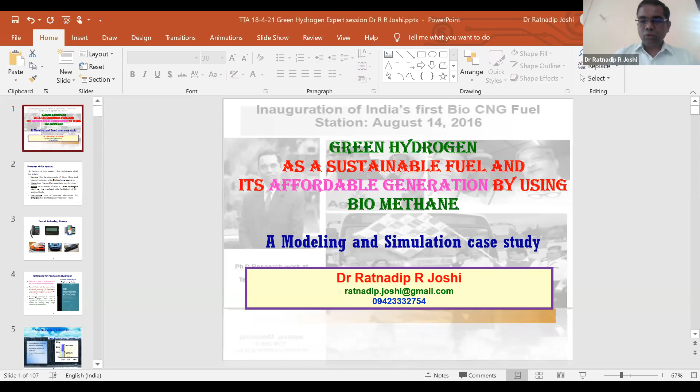Today's topic that has been allotted is something which reflects the newer changes in technologies. With a group of people where sometimes there are keen academic understandings of principles, or it goes on for applications and technologies, to present to such a group is really a difficult task for me.

However, I'm trying to give some good input to each category of people who are interested. Some might be into academic research, some might be into developing technologies, some might be installing plants, or it could be venture capitalists who would like to set up and support similar future technologies. So at the outset, I thank the TTA for the opportunity to discuss and share.

Today, we will be discussing green hydrogen as a sustainable fuel and affordable generation by using biomethane. The case study presented here would be more on green hydrogen. However, we still need to look into what are the other types of hydrogen, and what we really call green hydrogen.

So though the title itself, we generally say hydrogen is a fuel, but in reality, hydrogen is not a fuel. It is a carrier gas which can carry heat value and deliver it, and that's a great advantage. It is like a media, for example recuperative heat exchangers, where we are heating the surfaces alternatively, and the surface remains the same, so we can use it multiple times. Same thing happens with a carrier gas, because the same hydrogen could be used and leveraged for heating purposes many times. Let's now move into one.

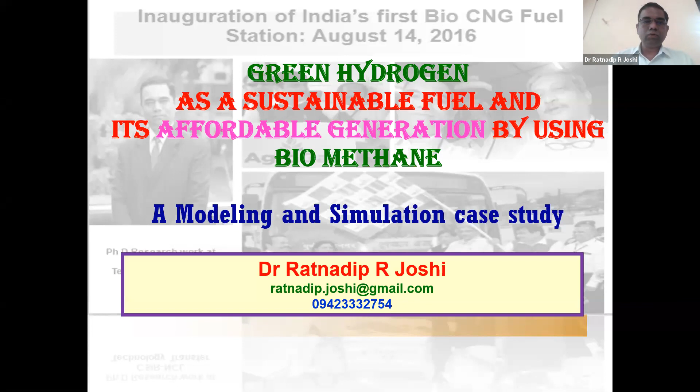Today, after the session, as a practitioner of outcome-based systems, I would always like to see what the learners or participants in the session would be able to achieve.

So we'll have a review of developments of gray, blue, and green hydrogen, what they really mean, and we'll come to understand the biomethane economy coming. Now when we say biomethane economy, I would like to make it clear it encompasses everything. It encompasses second generation bioethane, second generation ethanol or methanol, and dimethyl ether replacing diesel oil. All these economical aspects come when we talk on biomethane economy.

Let's understand how SMR and other forms like autothermal reactors and pyrolysis systems work for development of methane. Then we'll go for understanding green hydrogen plants, which I would show with the information and communication tools that have been enabled. Let's encourage the use of process simulators for simulation of such plants, which has an ideal case developed here that could be replicated as per requirement. Some of you who are interested, we can develop according to the size and system we could be providing.

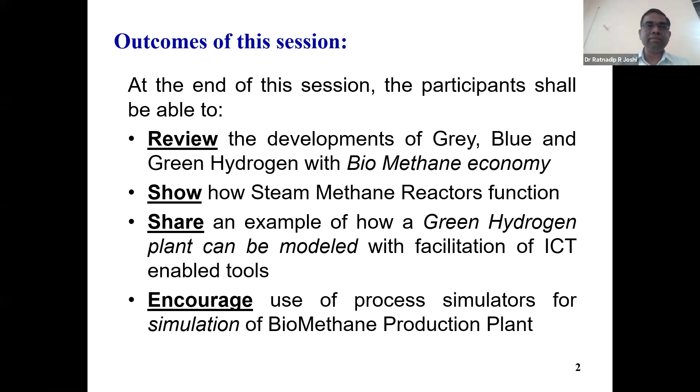Now why really do we want to do this? What is the piece? Let's see: we had been conveniently using landline phones, which were wired telephones. Suddenly, in between, there was a disruption that came as a pager, and before it even penetrated to 0.3% of the population, we got cell phones, which is now almost close to 68% of the population.

Now, will the same thing happen, that we would have a car running on fossil fuel or maybe natural gas, including oil, gas, coal, and maybe sometimes nuclear power, which are conventional? Then going to the middle one, which is an electric vehicle, battery operated vehicles - a fantastic topic. Lithium ion, sodium ion, lithium polymer, so many things we are discussing, empowered by solar thermal, solar electric, sort of photovoltaic - so many compositions we are looking into.

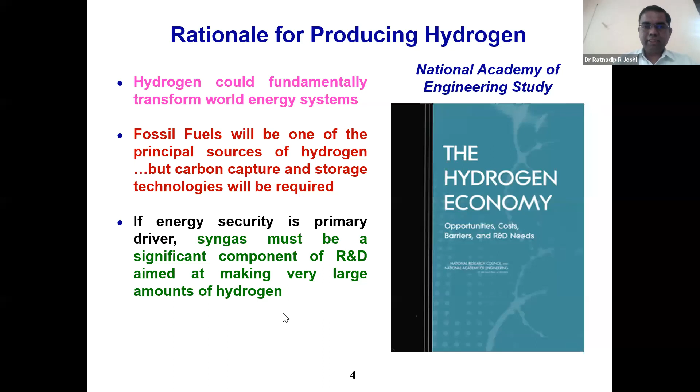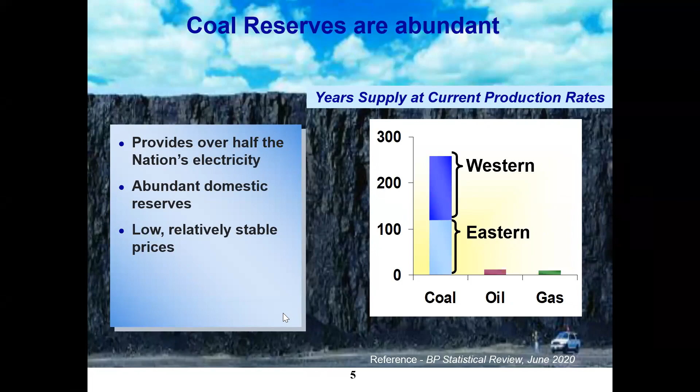Let's look at the Energy Outlook, recently published in September 2020. We can see the CO2 emissions coming with the help of usage. The green line here represents the current scenario - the way we are functioning right now, the way CO2 will come out.

With newer technologies, we are reducing the carbon tonnage per usage of application. Suppose we go for a reduction into the process, we will go for net zero. Firstly, we will go for a rapid reduction when we set the targets - what are the targets, we'll come to understand. Then with net zero, we will be able to cool down the temperature of the whole earth by 1.5 degrees centigrade, and the present target is around 2 degrees centigrade.

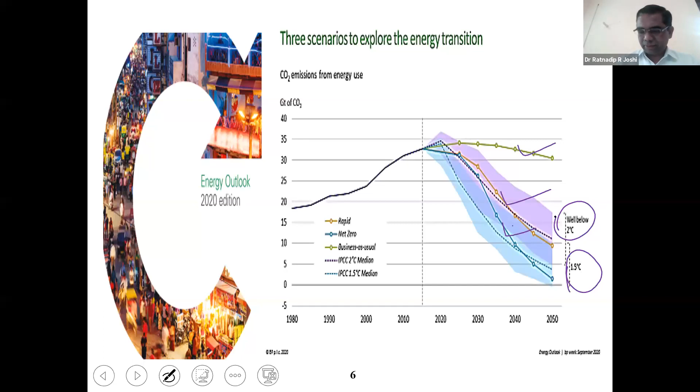So the melting of glaciers - we have recently witnessed such mishaps with increasing levels of sea waters and drowning of cities - that could all be avoided. So you can easily see this is the ultimatum we have to work on. This is why we really need to understand it fantastically with the statistics. Some other statistics I am providing to you here, you can see about it.

So the fossil fuels, renewables and electricity and their reduction - you can see the fossil fuel graph first. There is all kinds of reduction happening, and there is a predictive graph, so you can say 2030, 35, 40, and up to 2050.

What about renewables? When it comes to renewables, you can easily see the share at present is drastically increasing and will pick up around 2025 to 2030. And it comes to electricity - obviously with EVs, we are talking with fuel cells coming maybe 10 years away from us right now. So here again, the mobility systems need more electricity.

This is what I'm trying to present in a techno-commercial way, so we understand the commercial aspect, the business acumen associated with these. The changing structure of the global energy system - if we see oil and coal, there is a drastic reduction happening, and the remaining oil had a peak in '75, and now the numbers are coming monotonous parallel to the abscissa, reducing into the systems.

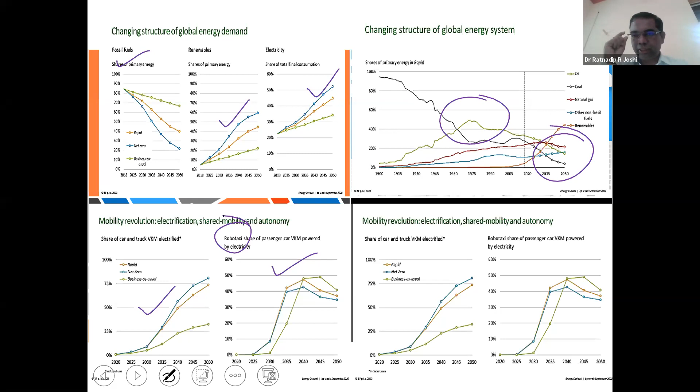With technology change, it is really feasible. A year exactly down the line, if somebody had said so many collaborators would come together with e-services and webinar series, nobody would have believed it. However, a year down, it is completely true. And when we come to the next one, where mobility revolution systems do come with the analysis.

So here I'm presenting more on where natural gas as a source of near zero carbon energy - why are we talking natural gas? Because we want hydrogen basically coming from natural gas. We don't have any other resource, and that's what we have to look into - the source from where hydrogen is coming, where hydrogen becomes a resource. The share of natural gas, abated and unabated both, if we look into with business as usual, what we are doing right now, obviously it would be reduced.

If we go for a rapid scenario, it would be around 40%. And if we go for net zero carbon, I understand that carbon positive, carbon negative, and neutral are all talking about zero emissions. So these concepts are all clear today.

Whatever I'm even speaking right now, I'm contributing to carbon generation. My carbon footprint is positive. Then we go for carbon neutral, where whatever carbon I am generating, I am reducing that, not sequestering, right? I'll come to that point later. And when I am producing less carbon than I am consuming, that's carbon negative. And maybe that is farther away. However, at least net zero or carbon neutral is the aim we're looking into.

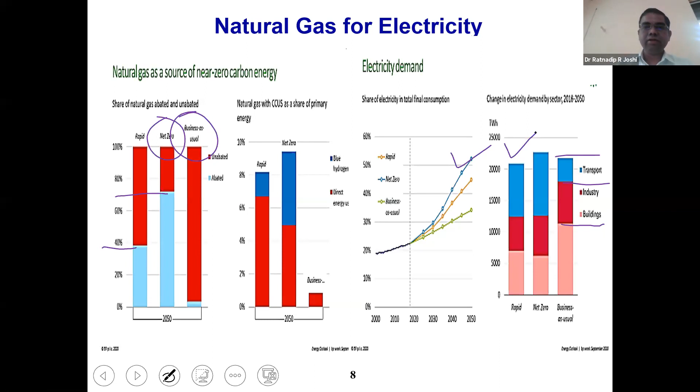Now this is more interesting for us because there are so many other ways of energy storage that we keep talking about. Some people say, let's store in batteries, for example. We will have wind power. Wind power is, again, a source for hydrogen also. So we'll get that, store it in batteries, transport it, then that could be used for converting into methane and hydrogen splitting. However, what are the chances of them becoming more prevalent?

And that's what I was always proposing, that's my thought, whether EVs will be a very intermediate thing for the future, coming in for the next 5, 7, or 10 years maximum.

It could be hydroelectricity, hydel power plants, for minutes and hours. The scheduling for coal thermal power plants, again minutes, hours, and sometimes 2 days. Then hydro with reservoir large capacities like Three Gorges in China, which is really scary and terrible. Similar kind of aspects here. Obviously then it could be for a longer time. However, we cannot build more of these. Even China is repenting on having built Three Gorges.

Right now, when we come to hydrogen, it could be hydrogen with or without carbon sequestration, right? So it could be carbon capture, utilization, and sequestration. And you can see this for longer term viability. This is the only source - why should we pay attention to that? And the second one, again, that's bioenergy. So charts and graphs tell us what will prevail in future, where should we invest, where should we find the technologies, where our aim and focus should lie, right?

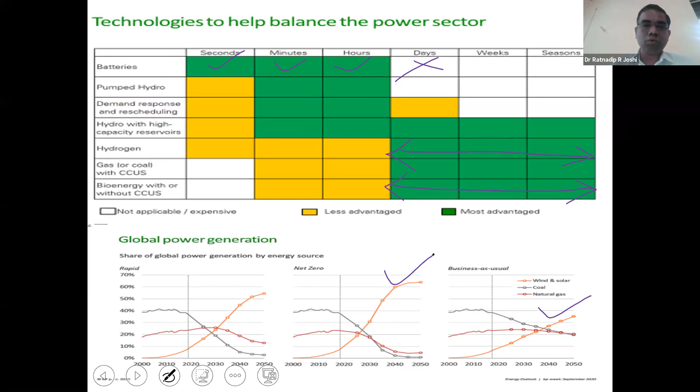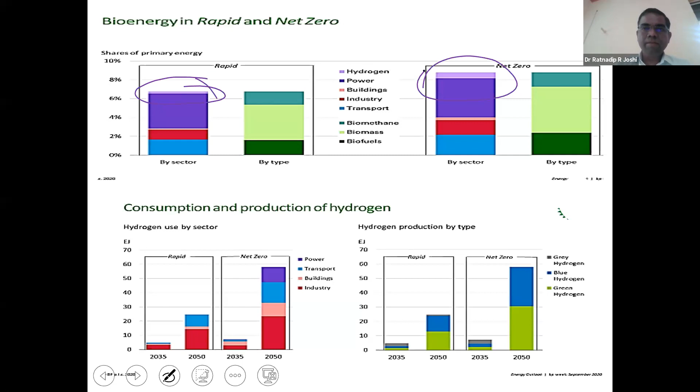If I look into sources of primary energy sector-wise, you can see hydrogen prevailing, and by type also. This comes into certain scenarios built for net zero, carbon neutral, to rapid reduction, and how they would respond to different compositions. You can see this top layer increasing for hydrogen coming into practice. This is the importance - net zero is really contributing to these higher sectors. Obviously power generated by other sources will continue, however by type you can also see biomethane and other components increasing, getting more importance. Why is hydrogen important for us?

As we know, the Paris Agreement - Chaitanya sir referred to the Indian policy. I'll show you in the next one where you can see this international agreement from 12 December 2015 with the United Nations Framework Convention on Climate Change. Like the certified emission reduction, CERs, to be earned and purchased by companies flouting the norms of the previous Kyoto Protocol, similarly for the Paris Agreement they have to pay for it, and there would be more business by reducing the tonnage of CO2 through producing hydrogen. This came into effect from 4th November 2016, originally agreed by 196 countries, however 191 actually signed.

That's what I would say - we can make business into 191 countries. So this is not limited to a certain geographical or demographic limitation. We can really go beyond that.

What global leaders are committing for, right? And most recently, most of these are 2021 statements which I have gathered here for you, starting with Amazon from February, with UPS, Atmos Energy, and some more energetical aspects. You can see the commitments they are giving for this. Obviously this makes a great opportunity as well as a sustainability effort - it's not just a sustainability effort for all, it's a kind of business that comes along with it, more plants to be set up.

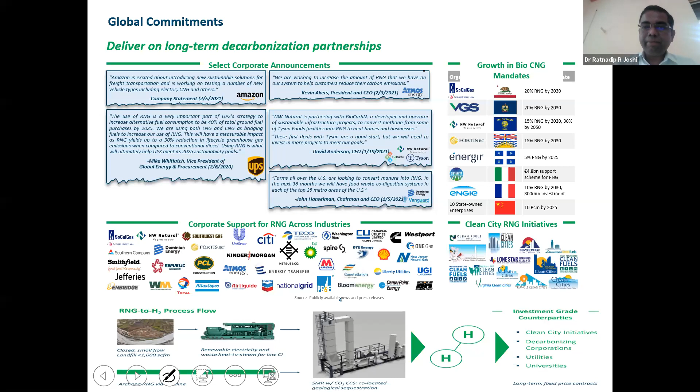India took the best lead earlier with some missions, or references we could see. However, a concrete step has been taken - 34 crore rupees in last year's budget to 6,300 crore rupees for this year's budget. This is certainly not leapfrogging, this is pole vaulting, as we call it - from this pole to that pole, vaulting probably into the National Hydrogen Mission, implemented since 1st April 2021 by the government.

And they are coming up with this - the draft has already been released and it's under discussion. So if somebody wants the draft, it's always with me, so you can really find out where it really comes up. So this is the draft.

Let me close it. So there are different stages where there could be a role played by different kinds of entrepreneurs, different kinds of venture capitalists - it could be research and development, proofing of the concept, pilot plant and deployment, commercialization and maturity, and different finances come in, for example government, venture capitalists, project financing, and so on. The technology being operated right now is with green hydrogen - the first important thing is understanding what these different types of hydrogen mean, which we will cover in the next couple of slides. However, the importance given in the Indian annual financial statement is on green hydrogen.

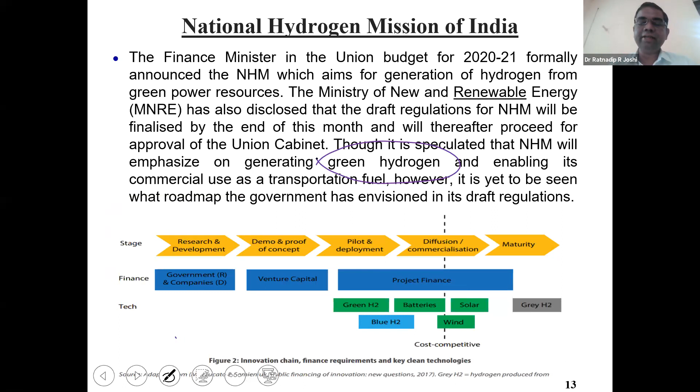Now, why hydrogen? Why so much importance? We are discussing here, and all technocrats like you are here. Most importantly, if you look into the time of production graph, it goes up - you can see that at a lesser time we can produce methane, while we take more time for ethane, propane, up to decane - C10 components. Even propane and butane, like LPG, take a certain amount of time to manufacture and process. However, methane is the easiest to produce, and it can further help us grow and provide hydrogen.

Now, why hydrogen? So many options - all your interesting options I have enlisted here.

So if you look into the heat content of each one of them in megajoules per kg, our lithium ion battery is 0.5 megajoule per kg, which can contain only this much heat per kg. Wood, ethanol, our coal, particularly bituminous, is 23.9.

Then we go for gasoline around 46, kerosene, LNG, then methane here. And obviously when it comes to hydrogen, it is 142 megajoules per kg. This is the reason why we are focusing more on hydrogen, making it a carrier gas.

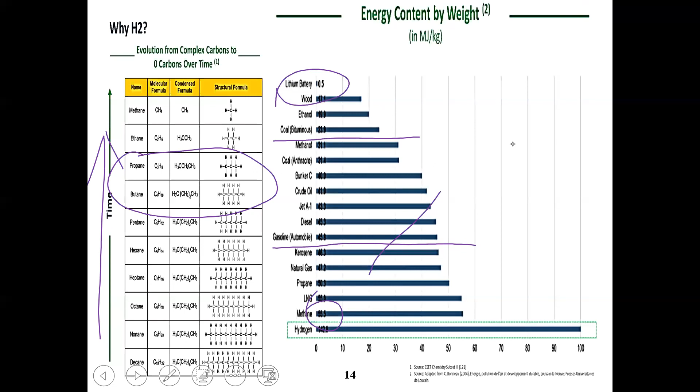The way we look into material for solar photovoltaic cells, where the band gap should be more, the same thing applies here in the case of hydrogen. The more heat content it can deliver, that gives us lesser flows, lesser operations, and lesser costs incurred into the processing systems.

I have given you the most popular fuels on the left hand side. Even basic crude oil is around 42 megajoules per kg, lesser than that. And that's what underlines the importance of hydrogen as a fuel carrier.

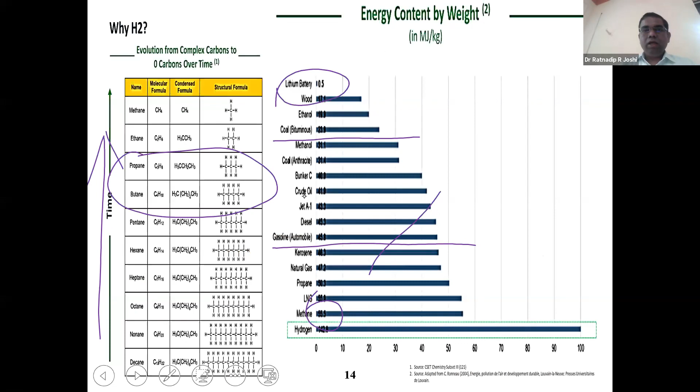All our thermal power stations, all present SMRs, the steam methane reforming gasification systems, most of them fall into gray systems. So if methane is produced, it's gray methane; if hydrogen is produced, it's called gray hydrogen. Now instead of this, that's what we are committing to, since sustainability parity is not there.

For example, hydel electricity is 0.9 rupees per kilowatt hour, 1.5 for coal, and LNG operated plants are 9 rupees. So there is no parity for environmental sustainability, and coal will always be cheaper. However, the kind of pollution and greenhouse gas emissions we are creating cannot be controlled or compensated for using such policies.

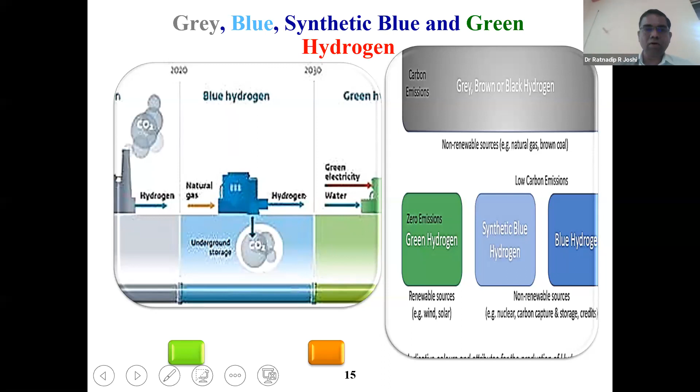Rather, green should be compensated with blue, so that whatever reduction or makeup requirement comes up should be fulfilled by blue hydrogen. This is what I hope the concept is now clear for each one of us. Now, I'm just giving you why it is so: the higher heating value of a fuel, as we call it, consists of the combustion product of water.

Whereas the lower heating value says that the water product of combustion is at vapor state and the heat of vaporization is not recovered. If the LHV is good, it's because all these gaseous components get out through the flue gas, and we cannot condense them all and generate the electricity again, right?

So out of whatever is the lower value which comes up out of these two, we take it as a net heating value. In general, what we can say is, if we want to have the higher heating value more, we have to condense the product.

For example, in tire pyrolysis units, what we do is the tar which is generated from tire or plastic pyrolysis is when the gaseous components are condensed and we generate the fuels from that. So there we use higher heating values.

However, where huge amounts of flue gases are generated, we actually do not condense all the gaseous components, and that's what we focus on, the lower heating value.

So though the gross heating value is 142, which comes up into this one, if a fuel has no water prior to the combustion, then the gross heating value is equal to the higher heating value. That is what we need dry, and we call it a dry gas.

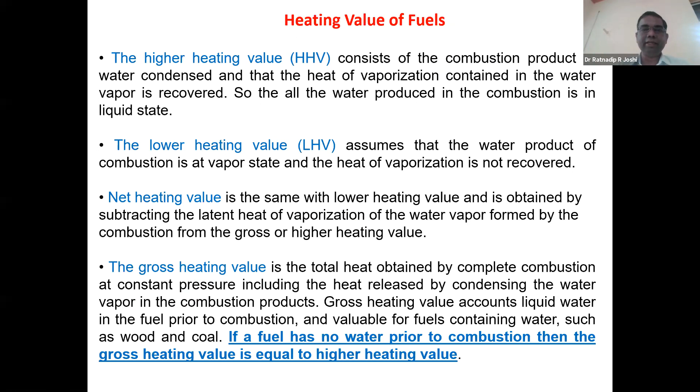Now these two concepts are important all the time, because yes, hydrogen is good. However, there would be certain attributes which would not be making it the best choice, where we need to work more, where we need to research more.

Let's explain. First is called energy density. Energy density is the amount of energy per unit volume, right? In the given liters of volume of the fuel, how much amount of energy is there, it's called energy density. The second term is the specific energy.

Specific energy is the amount of energy per unit of mass, that we are carrying, particularly provided into a given system. So here the energy which is being carried per unit mass, that's specific energy.

Now see this line, the effectiveness of hydrogen to gasoline, where we want to see what is there. Hydrogen has a higher specific energy than gasoline, however lower energy density even in its liquid form. So when it is per kg, it is providing us more energy in hydrogen. However, per volume it is lesser.

That means the volume required for hydrogen would be more, and this is an important aspect to note. For example, the 40 liter, 45 liter fuel tank that we are using, we may need to increase it more, even in compressed form.

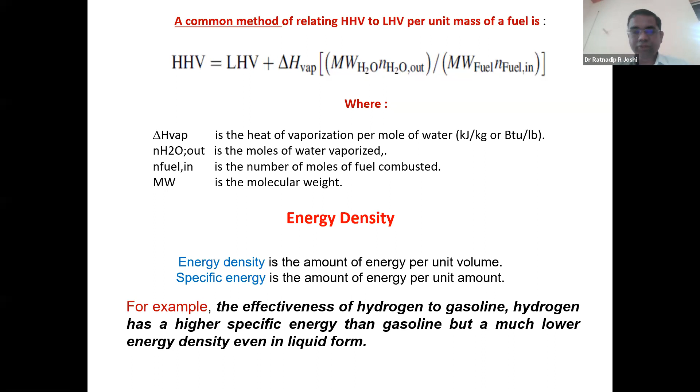Now let me compare that with methane, which is the popular fuel from which we are deriving the hydrogen. Now regarding densities, the density I referred to is 0.09 kg per meter cube, compared to 0.716 with methane, 0.85 for diesel oil, and 0.91 for gasoline that we use.

Energy density, you can see here, 3 megajoules per decimeter cube. Decimeter cube is liters, and 12.6 megajoules per decimeter cube. However, when we come to the lower heating value, we are calculating, not net or higher, 120, right? And I think this is the characteristic that makes us love hydrogen.

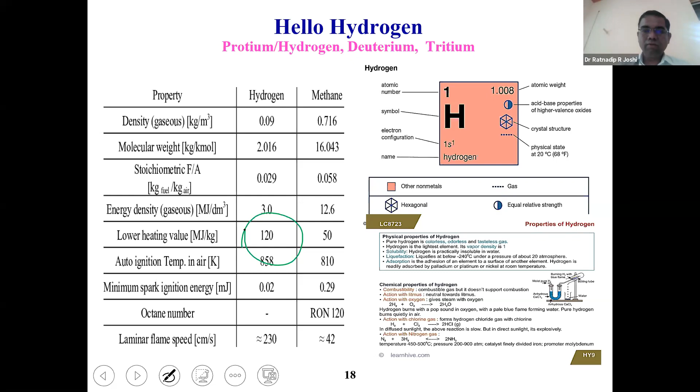Why should we go for it more, and definitely we should look into these hydrogen aspects. Now this is something more important for all of us. What is the cost then? If we are saying hydrogen is so nice, comparable, though energy density is lower, specific energy is still there. Let's see that one.

Let's focus on the Indian continent. I've given a comparative chart from the International Energy Agency 2019. Values borrowed from them, showing the Indian continent structure. We can easily see coal with carbon capture, coal without carbon capture. First is coal without carbon capture, then coal with carbon capture with very small units. Jindal and some other people have started this. NTPC has recently started with carbon capture and sequestration units. Then we have natural gas without CCUS, natural gas with CCUS, and obviously electrolysis or renewables.

If we look at the price, compare these prices all over the world. For example, look at the Middle East, or African countries, or the much loving and talked about United States of America. All of them have a certain range of change in the values. So we still are in a better position. That's what makes India so vital. We are blessed with these aspects, so why not encash on them.

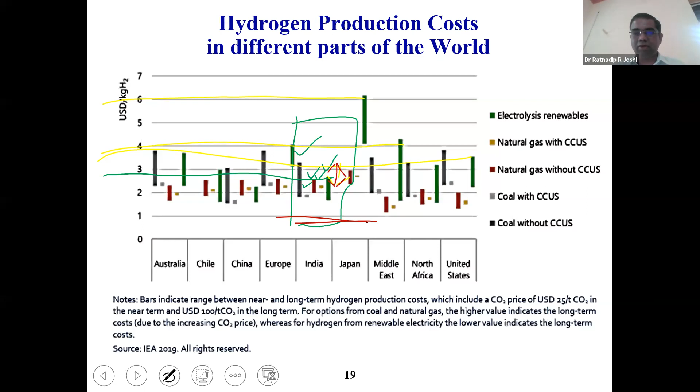Let us focus more on that, and can we shift our economy with these aspects. So these are cost systems, where most of the time we always have that blogging: technology is good, but what about affordability? Technology is good, but what about mass production? Everywhere it wins, everywhere hydrogen wins. This is somewhere I will not say is a prediction, however I just tried to pack up so many things to satisfy many people.

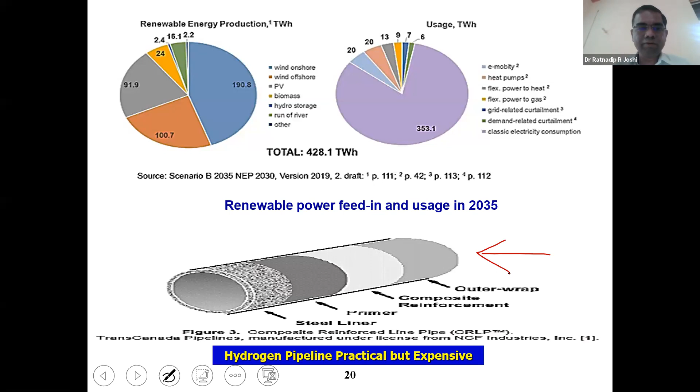So the same way we can transport it with the help of a pipeline. This would be a multiple casing pipeline with outer wrap, composite reinforcement, primer, and a steel liner. Maybe those who are interested and in the business can start prototype development, because you may be required in a couple of years down the line. So many questions are there: what is the role of hydrogen in the Indian economy, and how do we need to achieve that? Let's quickly, in the next 10 minutes, go through that.

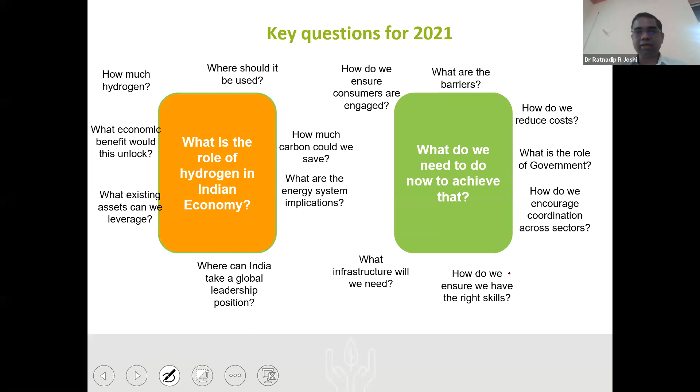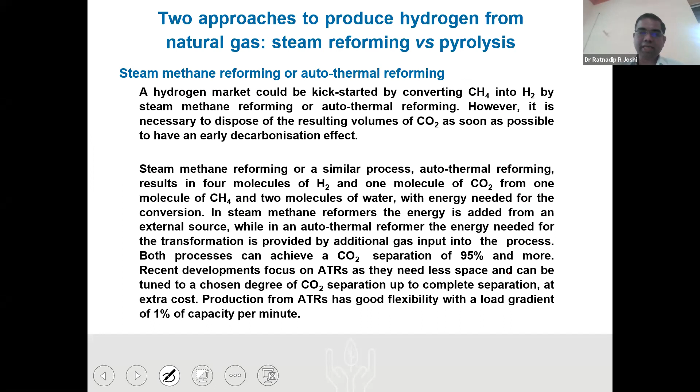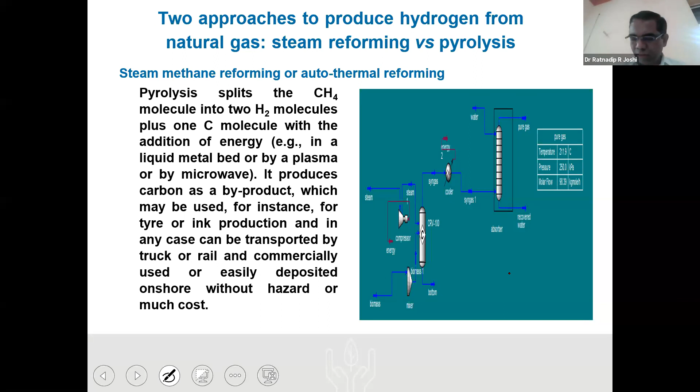Let's go ahead from steam methane reforming and use pyrolysis. Shell has developed a similar technology called SPG technology. However, this is nothing but steam methane reforming plus pyrolysis. The best of SMR, the best of pyrolysis, comes together to give us the best fuel in the world, the hydrogen. So here we say that both normal SMR and ATR presently need to go for CCUS, carbon capture, utilization and storage, or sequestration, because it is mandated now.

And it's implemented, we have to fulfill that requirement right in present. I will not read all these things.

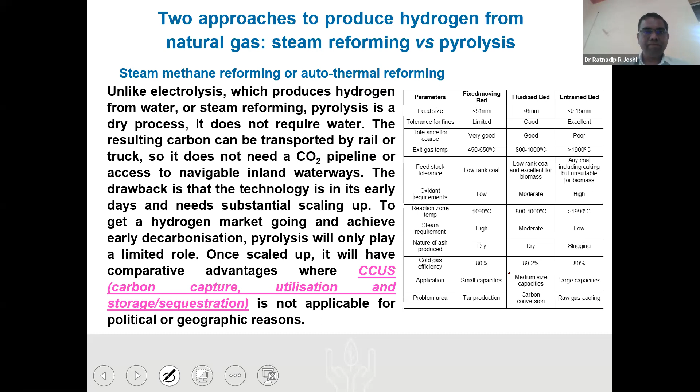So it comes up that the substitute of natural gas, which comes up into the biofuel systems, and can we go for the fuel cell vehicles?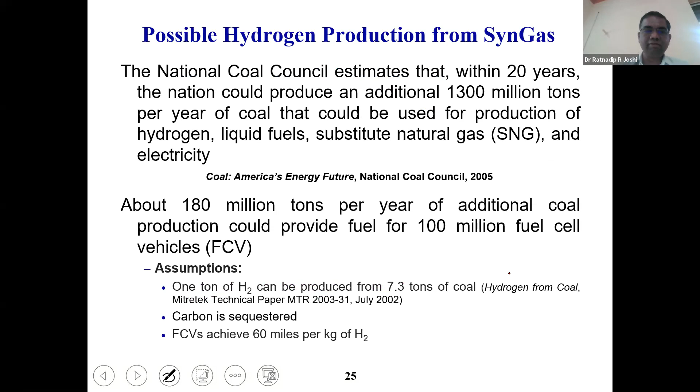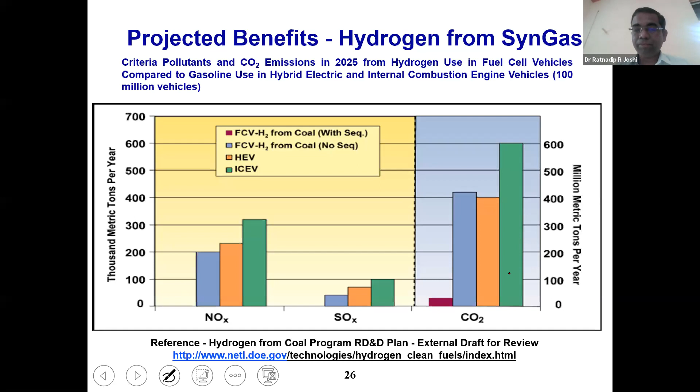Let me skip this one. So here you can see the emissions, the SOx, NOx, and CO2, which will be coming up from the fuel cell vehicles, which is coming from coal with sequestration and without sequestration. Then the internal combustion and other engines that we are using, the hybrid electric vehicles (HEV), and internal combustion engine vehicles. Obviously they would be contributing more, and the fuel cell vehicles would be producing lesser pollutants derived from coal. We are not looking for coal, we want to go away from coal.

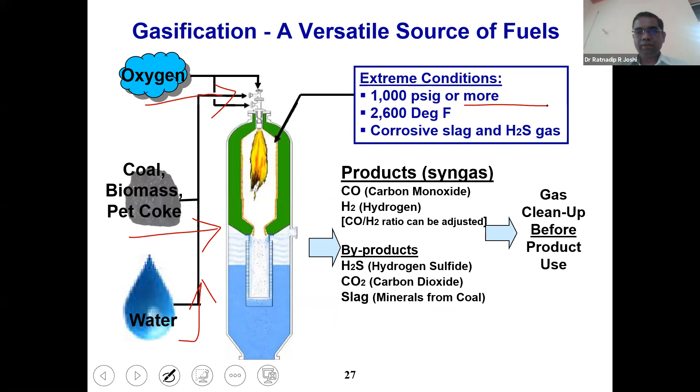So this is how in general what happens. The coal, biomass, petcoke comes in. From this we supply steam, and as required we provide oxygen, and at very high conditions, 1000 pounds per square inch gauge with 2600 degrees Fahrenheit, with corrosive slag and H2S gas that comes up. This is for all those who want to understand how it really comes up.

So many products we get. Right now the CO which is generated, we want to reduce that. We can react it with hydrogen and produce methane. However, from where this hydrogen will come is a question, right?

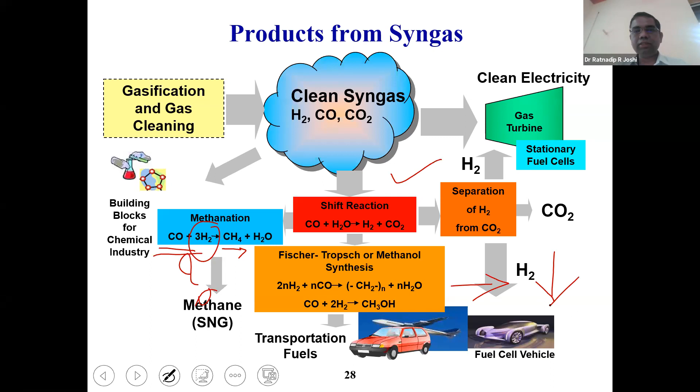Okay, now the next one is important. Obviously we can have the water gas shift reaction and produce CO2, and the steam methane reaction producing H2. Then we can have these fuel cell systems running with the Fischer-Tropsch synthesis, right? And everywhere we are getting hydrogen for fuel cell vehicles (FCV). So these are the different ways: central hydrogen production or alternative, which I would suggest, in situ, for the Indian context, right?

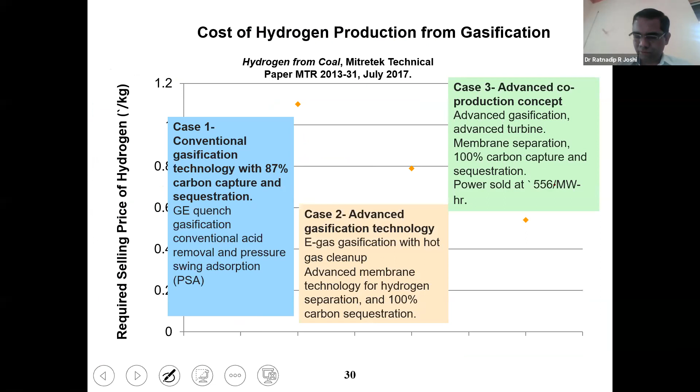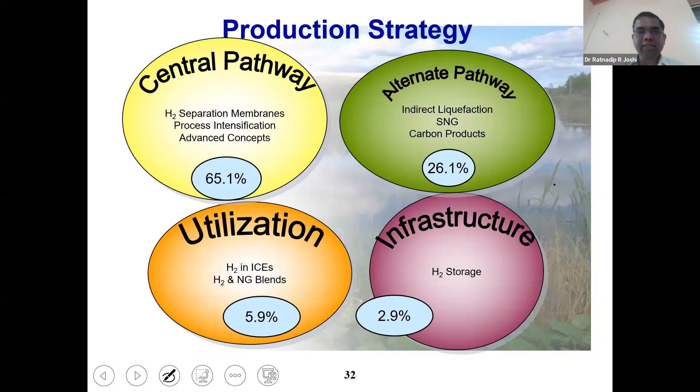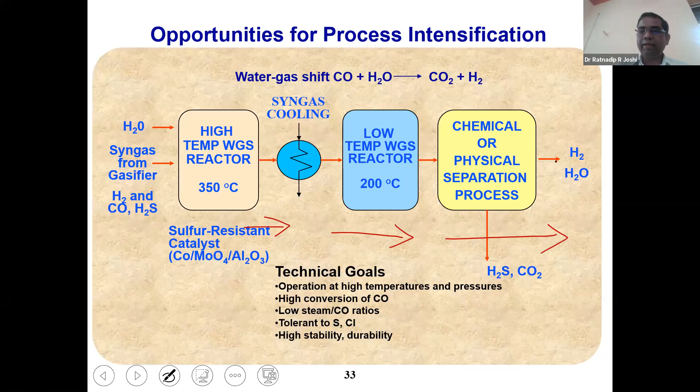So here what we get is syngas. That syngas is used in a high temperature reactor. It gets cooled, then we have LTS, and then we have some physical separations, and we get this hydrogen. I will show you the technology that we should use for separation. Right now, water gas shift reaction, for example, converts CO to CO2 and hydrogen. One mole is added here, so we can use a membrane reactor so that we can do it in a better fashion. The pure hydrogen one, we do have this technology.

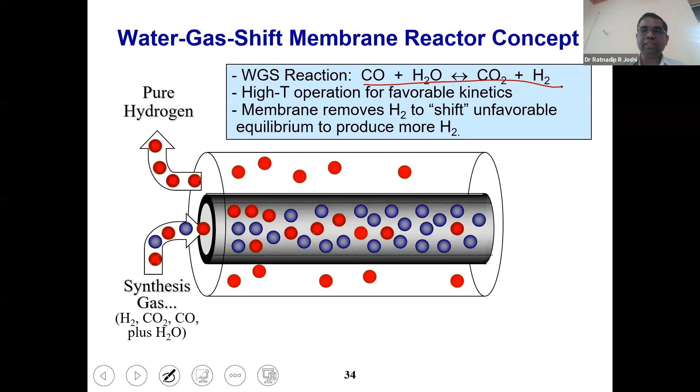Cost is important, so today we use pressure swing adsorption. These are different ways of membranes which we could use.

Now this is something more. I will spend 5 minutes on the slides here, because techno-commercially we would be more interested. Look at this - is it affordable? What is the pricing we would be coming into?

Now if you look into the fossil fuel natural gas in India, for regular fields, the cost is $1.79 per million British thermal units (MMBTU). And for more challenging fields, it is precisely $4 per MMBTU for natural gas. Obviously the demand is more because the more challenging fields, like the KG Basin where Dhirubhai phases are with Reliance, with Cairn, with Shell, are more challenging, and they demanded to make it $9 per MMBTU. Obviously government has not taken their views, and rather has decided not to increase the price, because if it increases, everything increases. And 1 MMBTU is 20.16 kg of natural gas.

So if I say gray hydrogen without sequestration, the present cost we are paying is 67.5 rupees per kg. If it is blue, with sequestration, it will become 89 rupees per kg in the present context, for regular fields. Obviously we have very limited regular fields - gas associated with oil wells or only natural gas at lower depths. This could be possible, however majority fields in India are more challenging fields. And here it was 89 for even blue, and for gray it is 96, 97 rupees, right? If we apply green hydrogen, blue hydrogen, right?

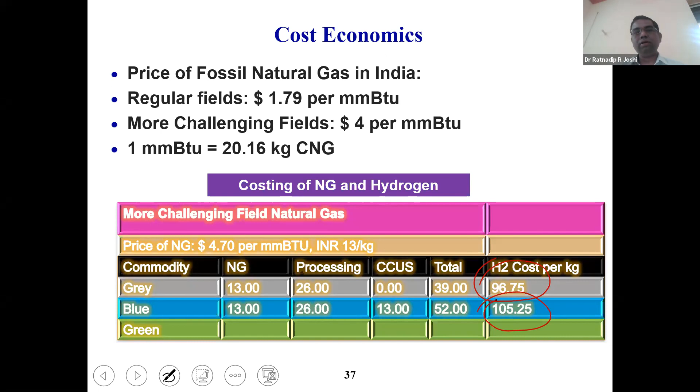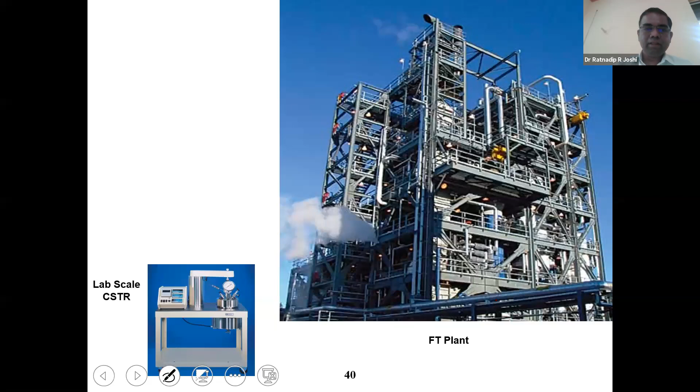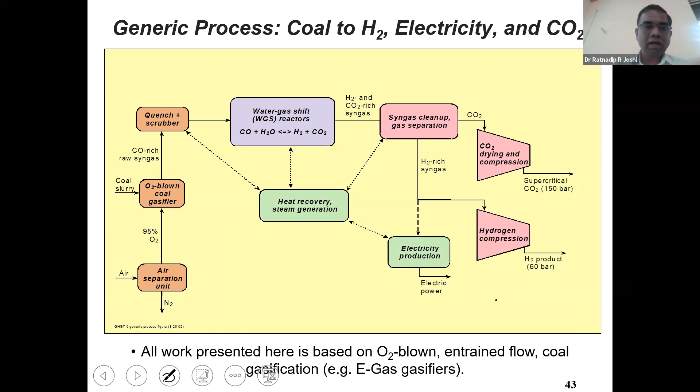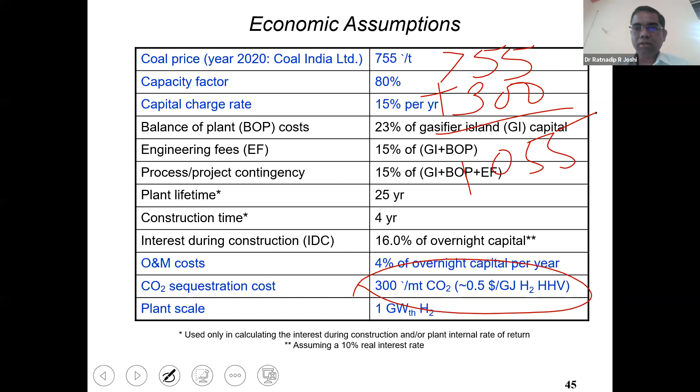Those interested in plant design, for them I'm showing how a real plant works. In this simulation, coal price in 2020 is 755 rupees per ton, and the sequestration cost I have calculated is 300 rupees per metric ton of CO2. So 755 plus 300 gives the real cost, 1055, and obviously this is going to disturb the whole economics. Even today with this cost, there are demands for reduction in coal cost.

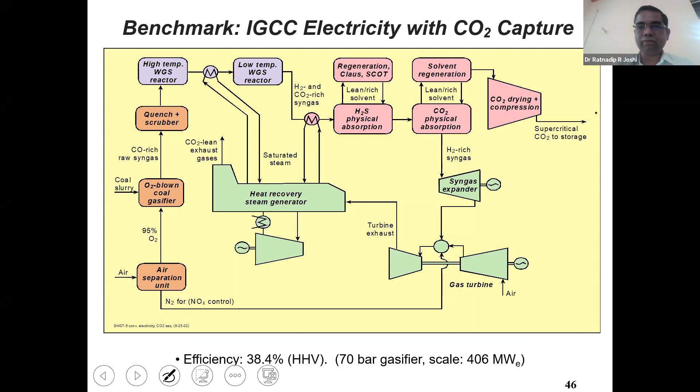What will happen if it is really sequestered? And we have to do that—it's not like we can get away from it. So here I'm just showing you quickly, look at them. Syngas expander, how the CO2—this is with CO2 capture. Here I'm showing you the CO2 capture. Earlier was without the CO2 sequestration or capture.

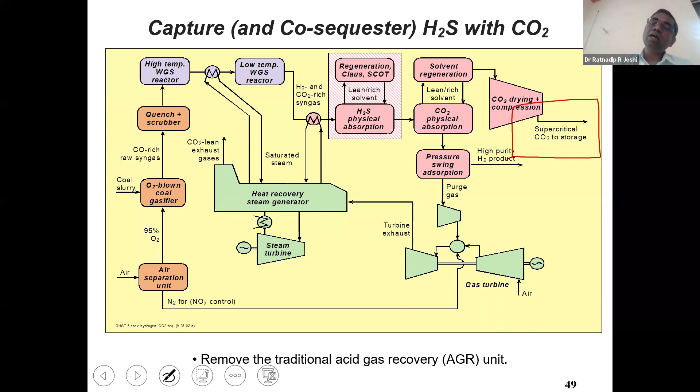Now there is a supercritical CO2 which can go for storage. And this is what we are doing, even supercritical—yesterday you might have seen this in the news, we were there. So the supercritical oxygen will be supplied dealing with the specific energy and the energy density. We will increase the energy density so that with lesser content mass we can provide more of the oxygen. That supercritical oxygen will come.

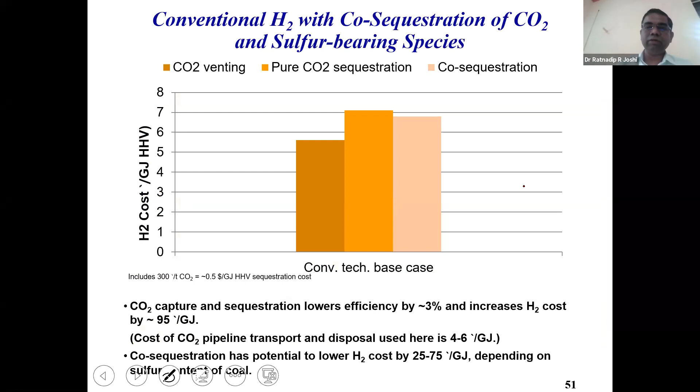This is with CO2 and H2S. I'm giving you many of these options and calculations. So this is what is somewhat with sequestration, CO2 capture. This is all future—not a single plant in India, except a smaller plant runs on this one. So this one is with the fuel grade hydrogen.

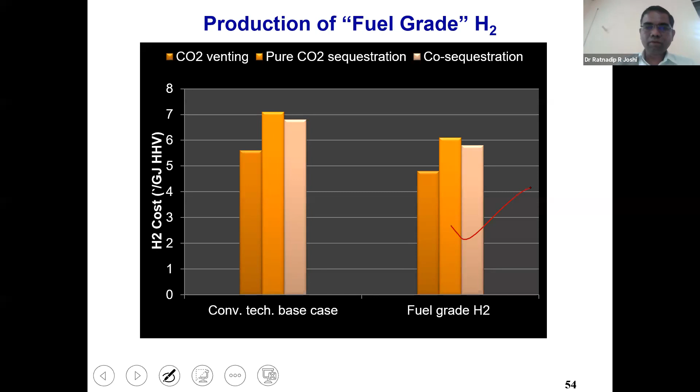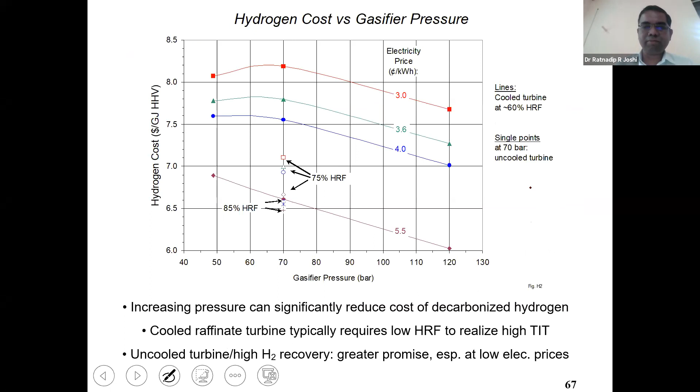Let's skip this—yeah, so this is the achievement. Let me come to the fuel. These are some statistics and information I'm giving you additionally. This is my simulation work I'm showing you, how a real plant, 3D plant, was created with RDIS company in Pune. Some of my students are working there.

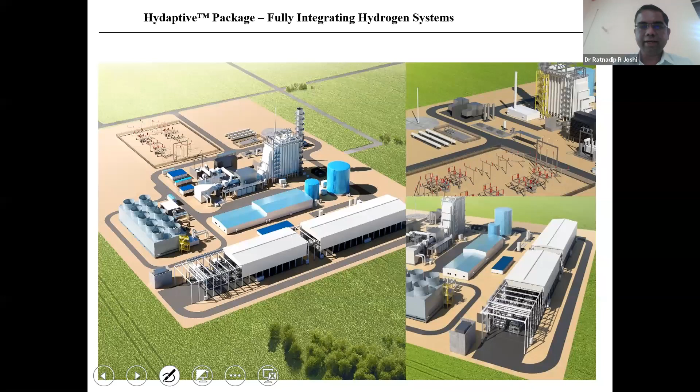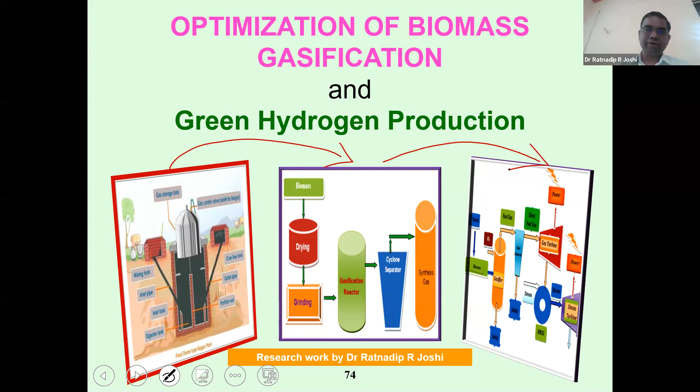So let me quickly share what really happens. We have this biomass which is now being used for gasification with synthesis gas, and that synthesis gas is now going for hydrogen production. So this was certain work which has been worked out quickly.

Yeah, there are certain queries, I would definitely answer them after 5 minutes—CCU and mandatory things, and thanks for the compliments for the session. The biogas, which typically refers to a mixture of gases, around 80-85% of it comes from anaerobic digestion.

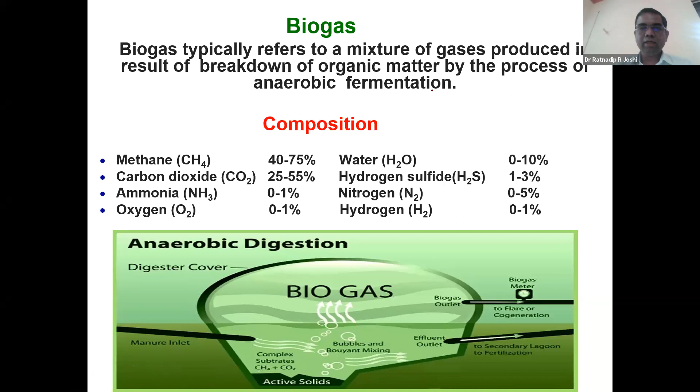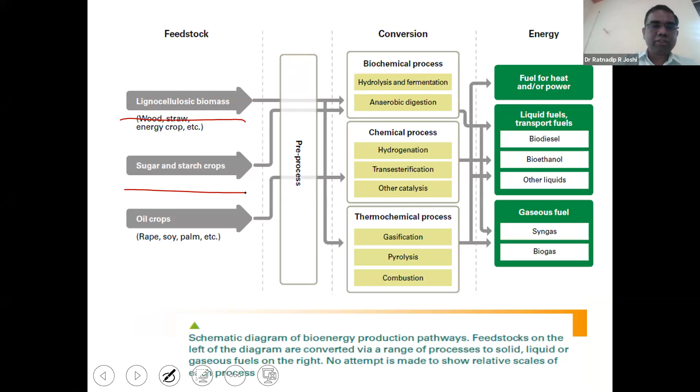You all know this, I'm quickly moving so everybody, even in electronics industry, should be able to understand. So it could be lignocellulosic biomass, sugar and starch, or oil crops—all of them will come here. This is my diagram for the plant. This is versatile, each of them can come in, and here you can see hydrogen producing, and it could be synthetic natural gas, SNG, or CNG, or if it is biomass, bio CNG.

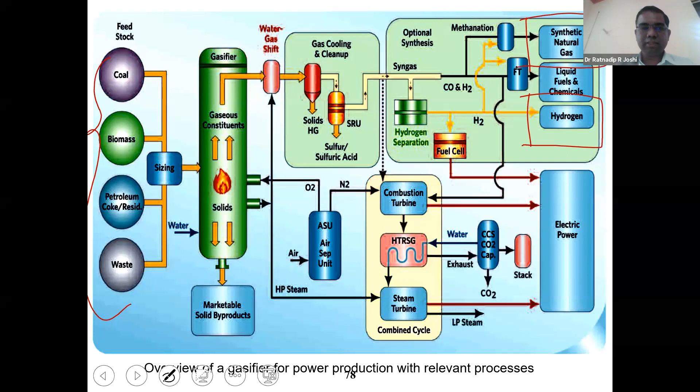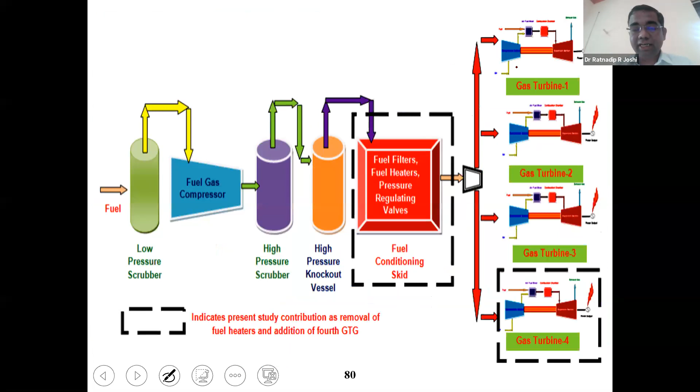This plant—this is how power production can come in, with fuel cells, these are with turbine power plants. Reliance, the NTPC Dadri power plant is functioning on this one that we have done—it was simulated, my own simulations. This is the example, and in the next 3 to 5 minutes we will stop here.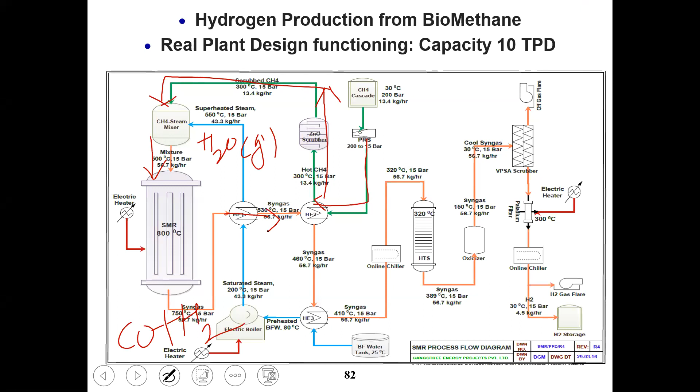Then it goes to the SMR, steam methane reformer, operating at 800 degrees centigrade. The syngas, CO plus H2, goes up from there, then there is heat exchanging. This heat exchanging network is not implemented in any other plant—we have visited the Godrej Vikhroli plant and many soap manufacturing plants, and these are not implemented anywhere in the world; this is the first plant really working. Then we have the electric boiler, then it goes to the high temperature shift.

Or it could be a high temperature separator. We have omitted the LTS here. This is another disruption which has been put into technology. Then oxidizing with that, the cool syngas goes to what is called a VPSA, the pressure swing adsorption or vacuum pressure swing adsorption, where the scrubber technology handles adsorption-desorption mechanism, one column on adsorption, one column on desorption.

So this can even be replaced by the membrane reactor, right? Later, a membrane separator, however increasing some more cost, and here we get hydrogen. So this is how you can look into it. So I've given you the balances in general.

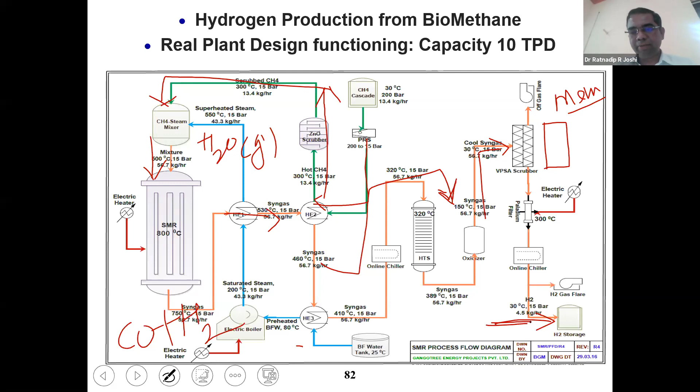So if you can see, suppose if I have close to 50 kg of methane mixture coming in, I'm getting close to 5 kg of hydrogen, right? This is the best efficiency which has been leveraged. So 10% of that would be completely converted to hydrogen.

And here is the cost economics. The cost of in-situ manufacturing is 210 rupees per million metric British thermal units. And if we look into this, you can see it doesn't need CCUS because there is no carbon production or generation into the environment, no pollution. So this cost with the Indian mechanism would be costing around 96 rupees, sorry, 78 rupees, and just compare them with the earlier costs, right? 97 rupees and 105 rupees.

And this could also be brought down because if the biogas system and the power generation hydrogen separation unit are clubbed together, in that case the cost may further go down, right? And it is 10 tons per day, 100 tons per day. Definitely, obviously this will not bring it down to 50 rupees. 78 rupees may come down to 70 rupees.

However, even today 67.5 rupees per kg is the hydrogen we are receiving, which is gray hydrogen without any sequestration from marginal fields. If it is from the challenging fields, which is more prevailing, maybe a couple of years down we have to purchase that only. The marginal, easy fields will go off. It will cost 96 to 100 rupees, and this would be around 80 rupees. So the cost difficulty is not there at all.

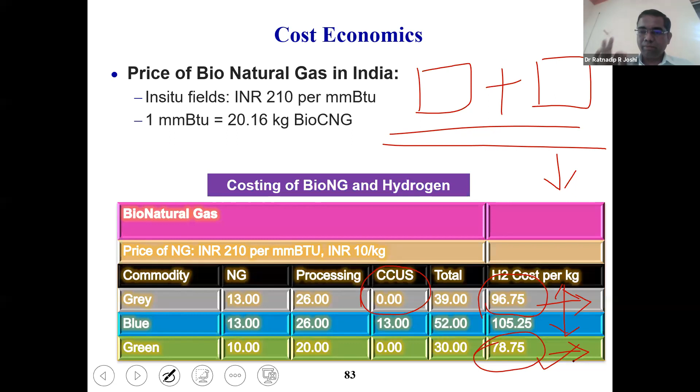So this is the only thing here, just one minute here I will spend and then we will stop. Suppose instead of only hydrogen, if we produce liquid fuel, for example gasoline and diesel oil, with the Fischer-Tropsch synthesis, what would be there?

So 8.1 kg of methane, and let's say, for example, right now if I take a cost of 20 rupees, that's 160 rupees that we are spending, and here we are generating 8 liters of oil. 8 liters into its cost, 40 rupees is the production cost, rest all are taxes, so it becomes completely double. Obviously around plus 80 is the operation cost, 0.5 as a business thumb rule. So 240 rupees is the cost and 320 rupees is the selling price at present, even with FT with biomethane.

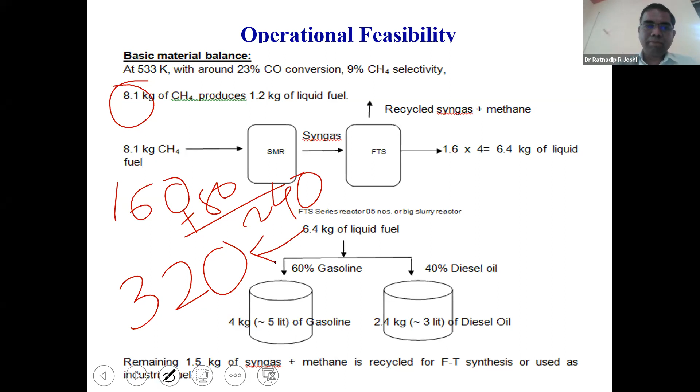Suppose this is fossil methane, why are we not doing this right now? Suppose it is fossil methane, then the cost is 320 rupees here, plus half of that, that is 160, that is 480 rupees, and the cost of liquid fuel is 320 rupees. It is the same. So we are producing at 480 rupees and selling at 320. There is no business which will work, right?

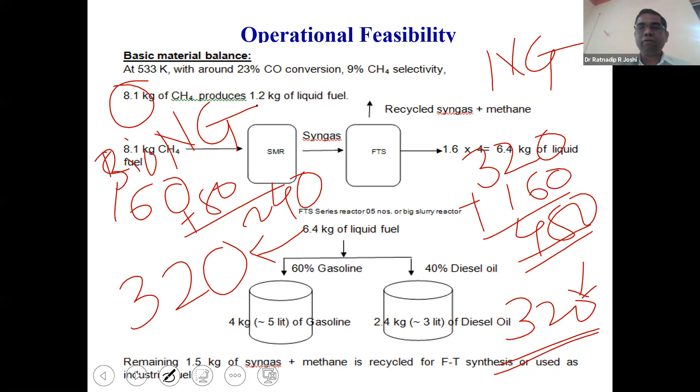So this is not feasible with the present natural gas. However, this is feasible with the bio natural gas, right? So you can produce hydrogen. If you don't want, you produce gasoline and diesel oil fuels, or one can set up the plant for both, partly hydrogen, partly for liquid fuels, right? So these are the steps in between.

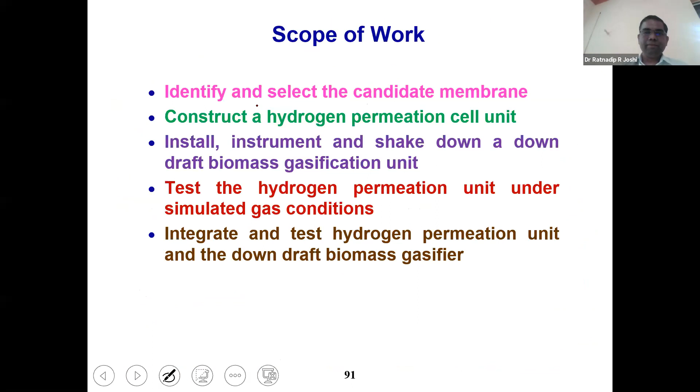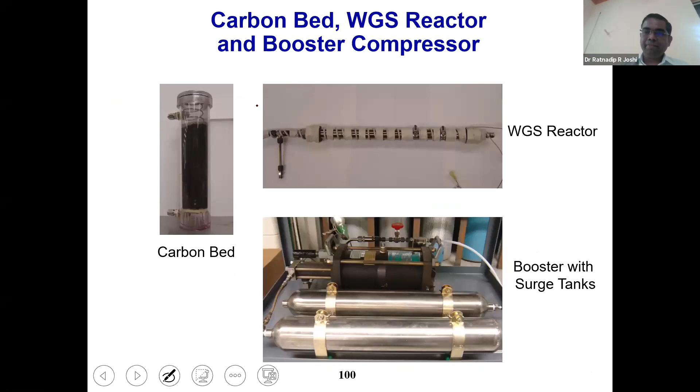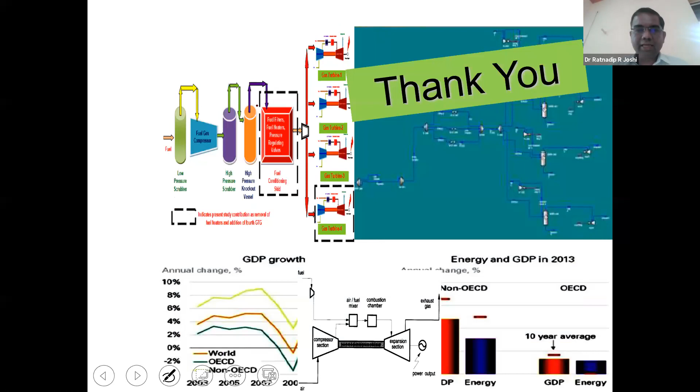So I think with that I will stop here. So the main intention of introducing hydrogen power, its types, and the ways it is being produced - gray without any sequestration, blue with sequestration, green from bioresources - has been covered, and the case study, which is a practically functioning and profitable case study, has been presented for all of you. Any input, any suggestions are mostly welcome.

These are all my certain simulation diagrams which I have placed it.